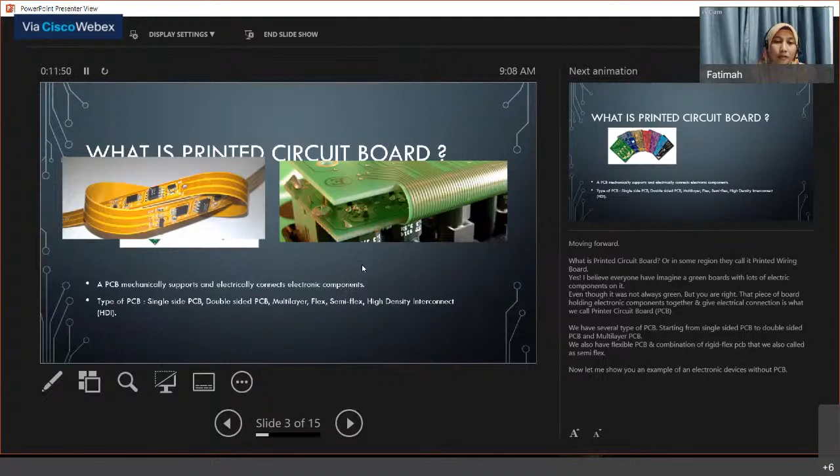And the last one is HDI, high density interconnect. The complexity is higher than the rest. This is what the future will look like. Even though a lot of electronic devices are already using HDI type PCB.

Now let me show you an example of an electronic device without PCB. Oh sorry, I have another one first - this PCB with components is called PCBA. When it's bare without components, we call it bare board or PCB. But if the PCB has components, we call it PCBA, printed circuit board assembly.

I want to show you here an electronic device from 1948 that did not have a PCB. We can see here it's a little bit messy, and I believe it's very hard to troubleshoot if your TV has a problem in this area.

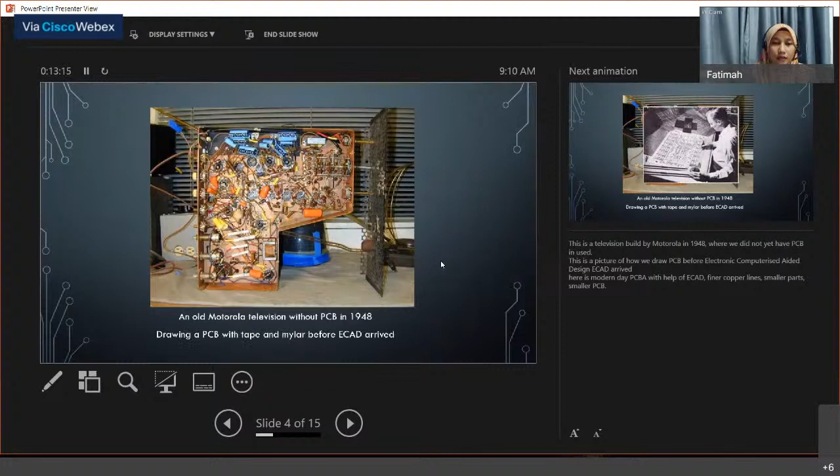This is a picture of a PCB engineer drawing a PCB with tape and mylar before ECAD arrived. ECAD is electronic computer aided design. So this is the outlook of a modern day PCBA with the help of ECAD.

The copper we can see here has finer lines. Components are smaller, and the PCB is smaller, and even if it's the same size, the function will be - they can cater to a lot more functions.

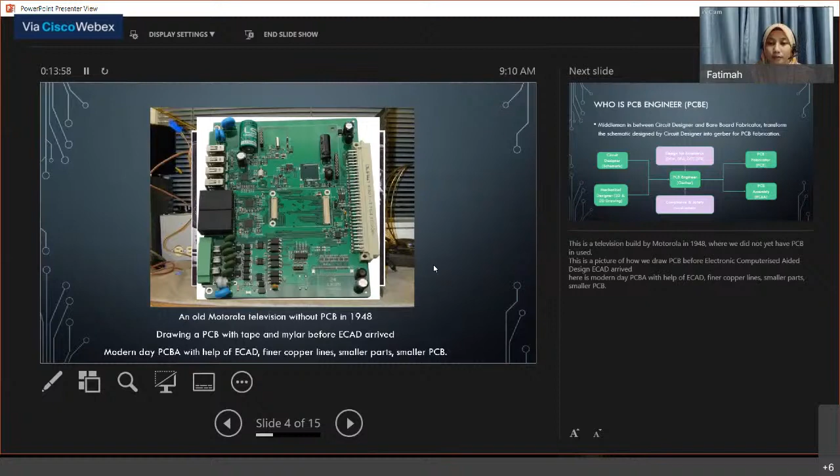So moving forward, who is a PCB engineer actually? In layman's terms, a PCB engineer is actually a middleman between the circuit designer and the bare board fabricator. They transform the schematic design by the circuit designer into Gerber files for PCB fabrication.

So we have an image here. PCB engineer is in the middle between circuit designer and PCB fabricator. The circuit designer will give output in a schematic and give it to the PCB engineer, and the PCB engineer needs to export it to Gerber. With the Gerber, we give it to the PCB fabricator to fabricate and it becomes a PCB.

That is, I can say, a very straightforward arrangement, but in actual practice it's a lot more complicated than that. We take information from the schematic, also the mechanical information in 3D and 2D drawings, and make it input, taking it into our ECAD system. From there, we do the process of making the PCB.

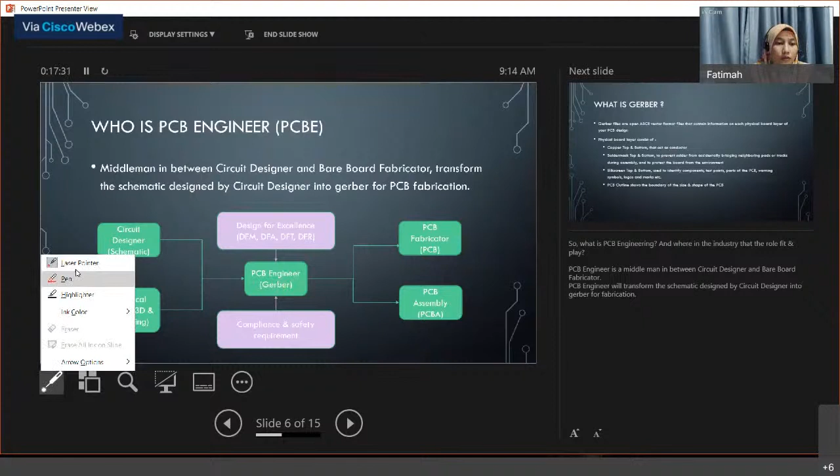So the output here is Gerber. What is Gerber actually? Gerber is a series of files in a format of ASCII vector that contain information of each physical board layer of your PCB. So what is a physical layer? A physical layer is something that we can see in our hand.

From the PCB, I did not have an example in my hand because I'm at home. But the PCB, if we can see, usually they will be a color, right? Green, or red, yellow, blue, black, white. This color actually comes from the solder mask.

But okay, we talk about this one first. So the essential is the copper top and bottom that acts as a conductor.

Then another one, the second most important thing for me, is solder mask top and bottom. Solder mask is to prevent solder from accidentally bridging, because currently our artwork, our layout has become narrower and smaller. It will be a high chance for us to have a bridging solder if we did not properly solder mask our PCB.

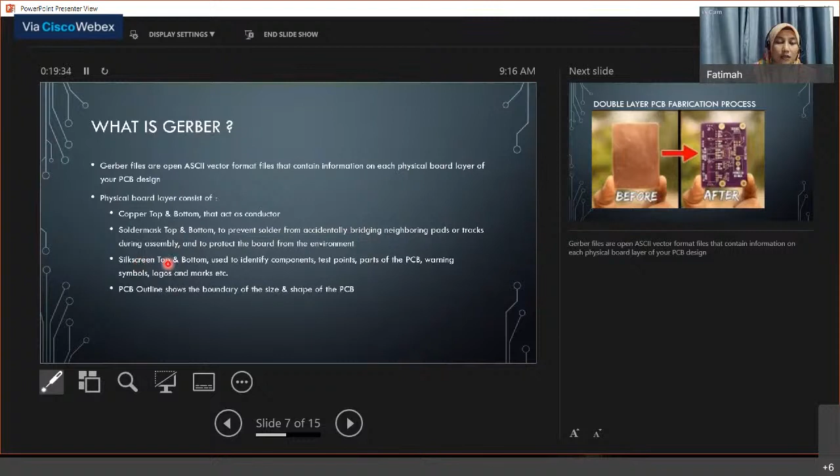So silkscreen is not essential actually. It's used to identify components, test points, parts of the PCB, warning symbols, logos, marks, and etc.

But with the more high density PCB, the less silkscreen will be used, because silkscreen adds to the thickness of the PCB, and then your stencil, when the solder paste wants to squeeze, it will be uplifted a little bit, and disturb your solder paste quantity on top of the PCB.

And then the last one, but also the most important one, is the PCB outline, that shows the boundary, and the size and shape of the PCB.

Okay, so the next one I will show you is how from the Gerber, our fabricator will make a PCB.

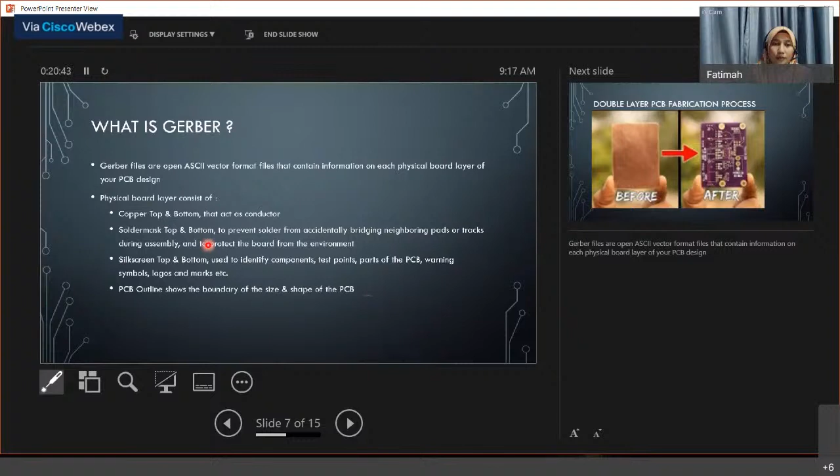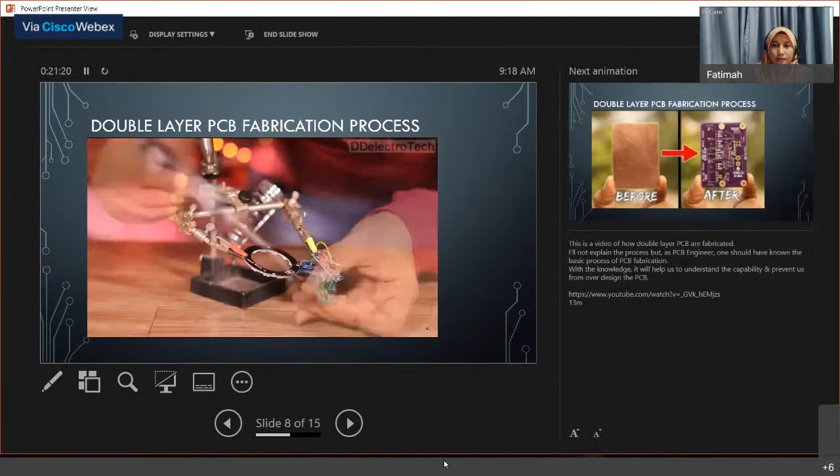In the last 4 years, I have made hundreds of electronics projects. In almost every electronics project, I have used PCBs, but this time we are going to China, to a city called Shenzhen, to show how PCBs are actually made. Thanks to PCBWay for inviting us there.

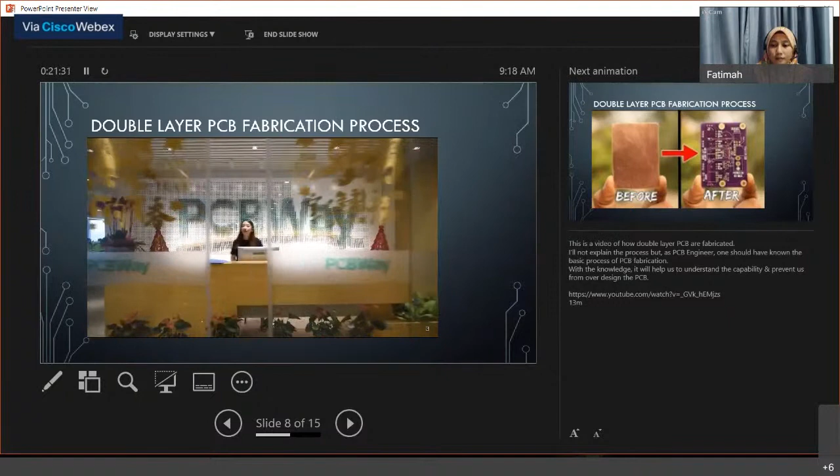After we make a PCB order on their website, first engineers inspect our uploaded PCB file. They conduct a DFM review by checking the trace widths, the space between the traces, hole size, etc., and ensure the design is error-free and fits within manufacturing capabilities.

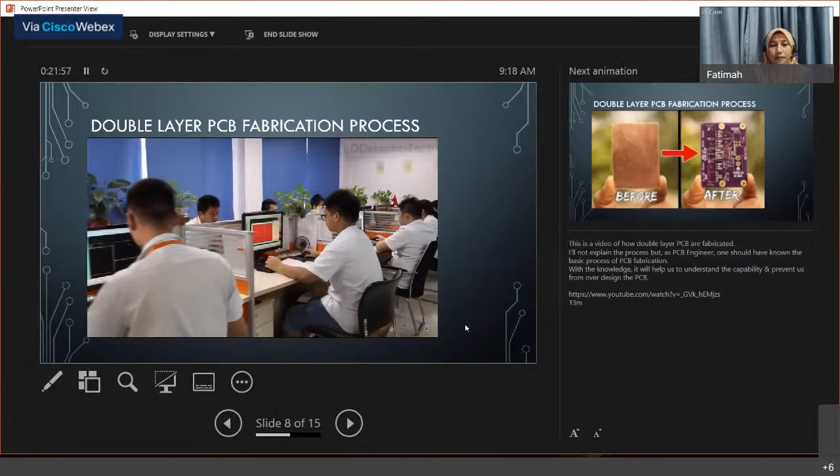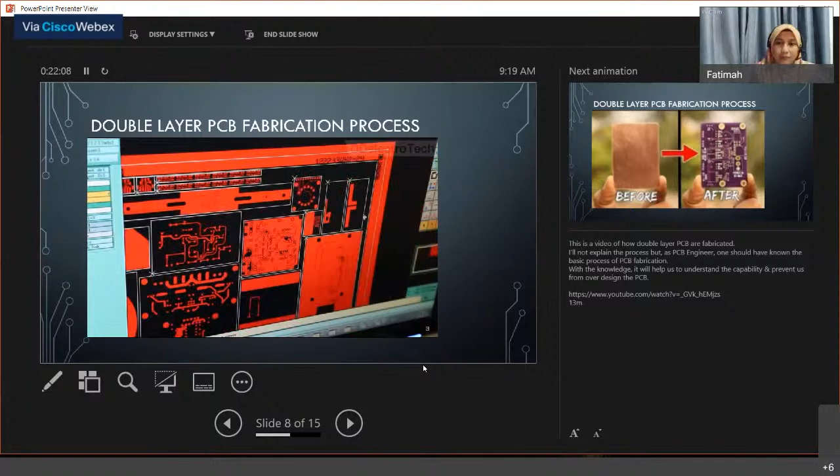After checking several circuits, they combine them on a large production panel, which is much more efficient to handle through the factory. Thus, the production cost also decreases.

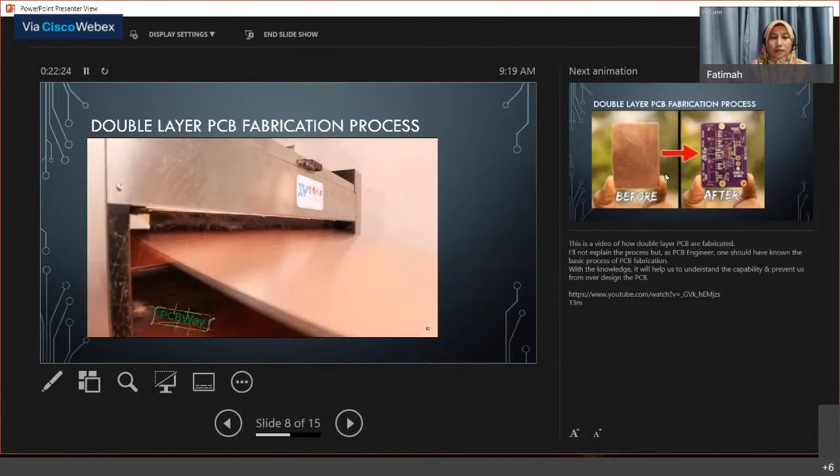First, the board is dry cleaned in a machine, and then cut into small pieces, which is suitable for manufacturing.

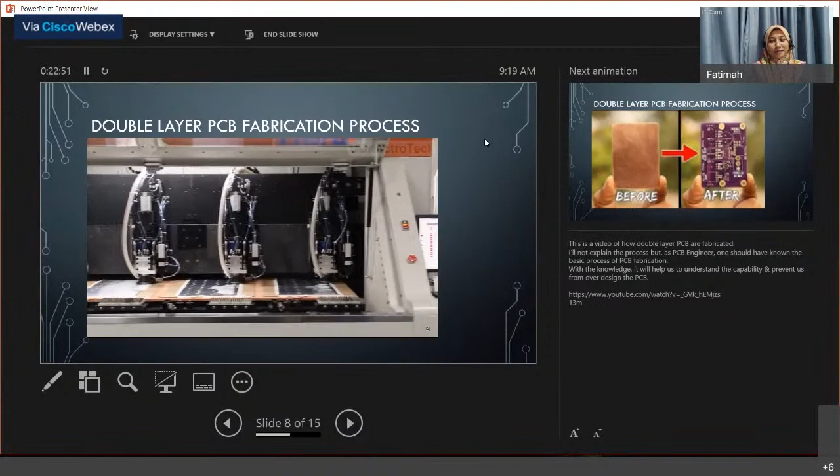After cutting the boards, they come to the drilling room. Drilling is done for two purposes: for connecting the leaded components, and for the via holes that link the copper layers together.

First, the operator takes an MDF board as exit material. Then he loads one or more PCB panels and places it on the machine. And finally adds a sheet of aluminium as entry foil.

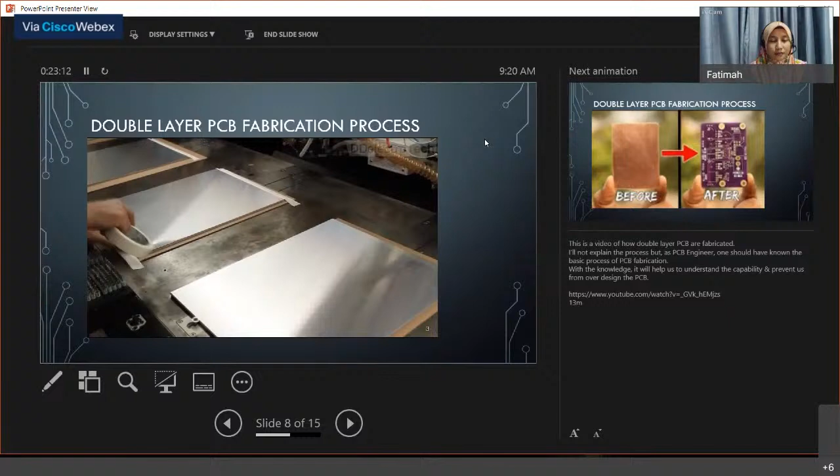Those machines are computer controlled. After selecting the right drill program, the machine starts working.

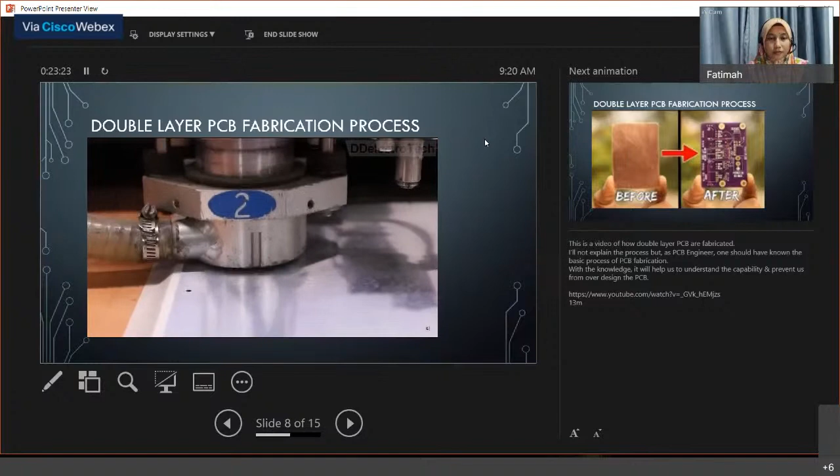Drill change is fully automatic. The machine selects the drill to use from the drill rack and checks that it is the correct size, and then loads it into the drill head.

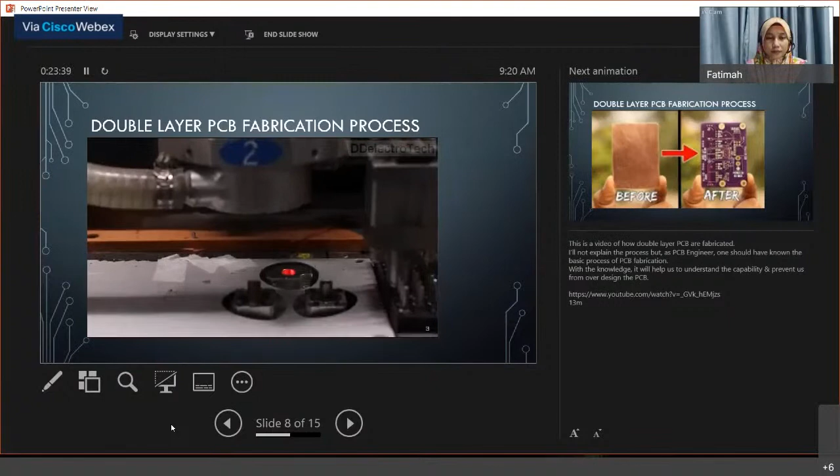This is an air-driven drill which can rotate up to 150,000 revolutions per minute. The high-speed drill makes the hole walls cleaner.

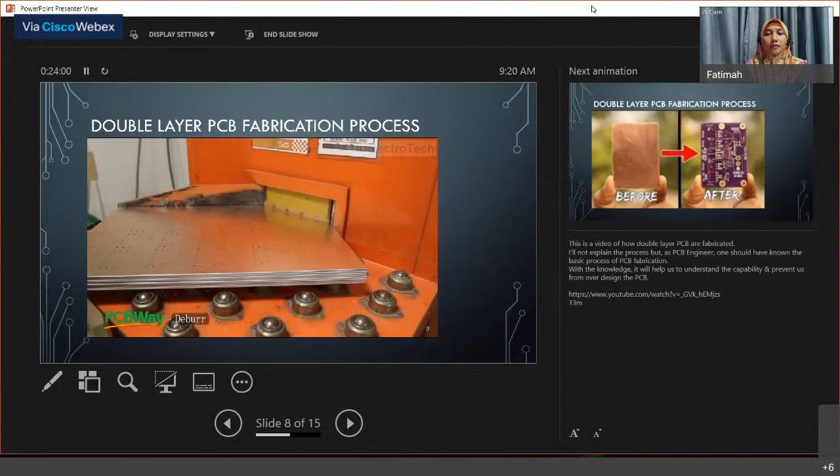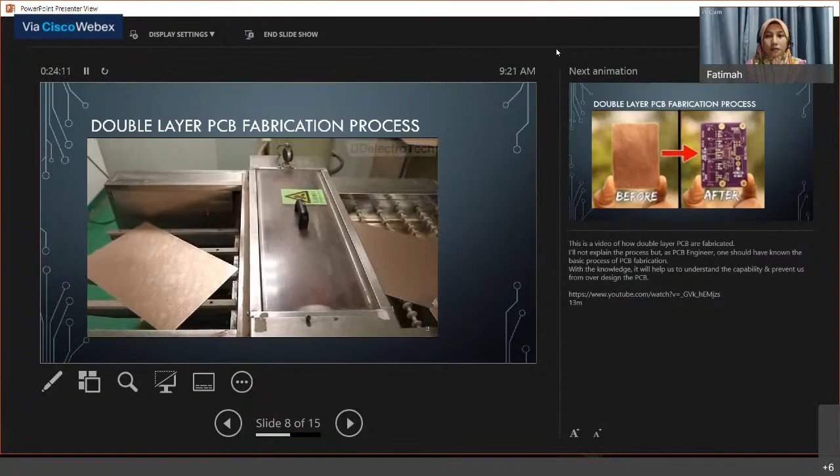After that, the corners are trimmed to make it rounded. Then the surface is cleaned. The machine automatically smooths the edges of the boards, one side at a time.

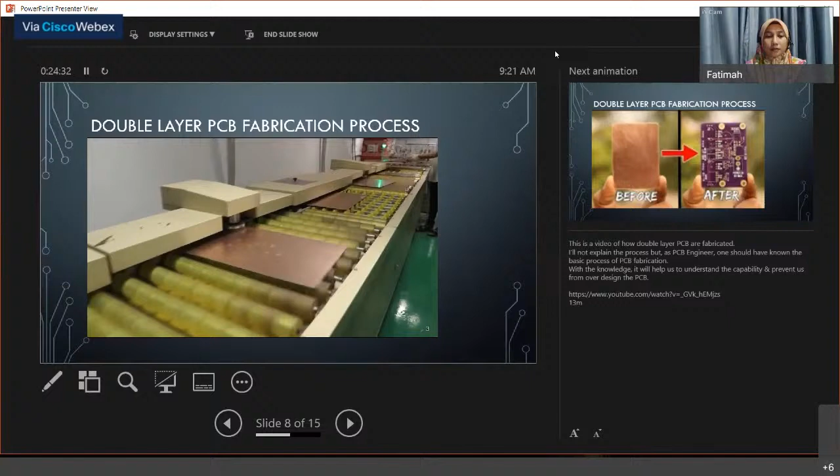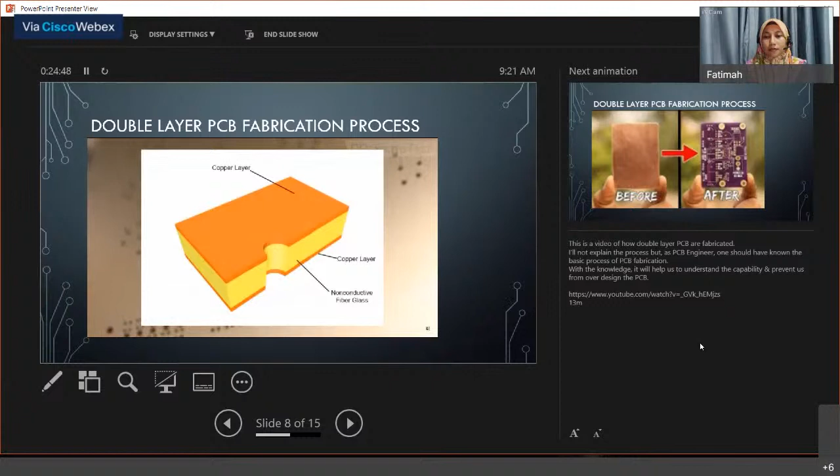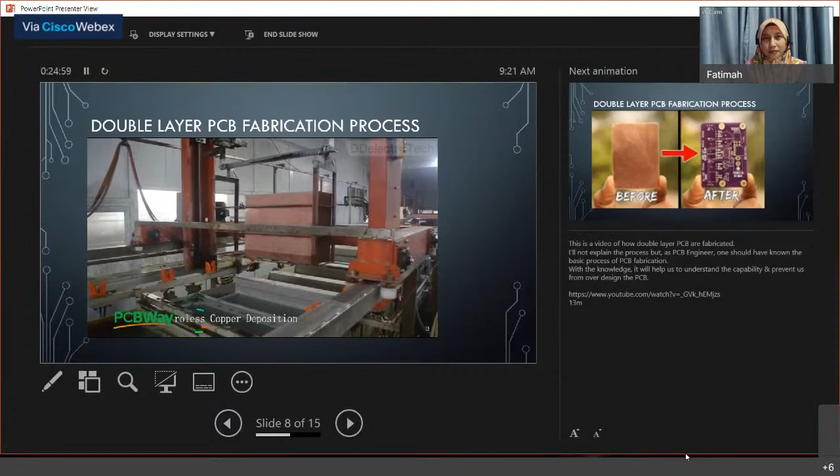As the board has drilled for making connection between top and bottom layer, but the middle layer is non-conductive fiberglass. So to make connection between top and bottom layer, the board comes for electroless copper deposition. The operator loads the panels onto the flight bars. The panels themselves act as cathodes for electroplating.

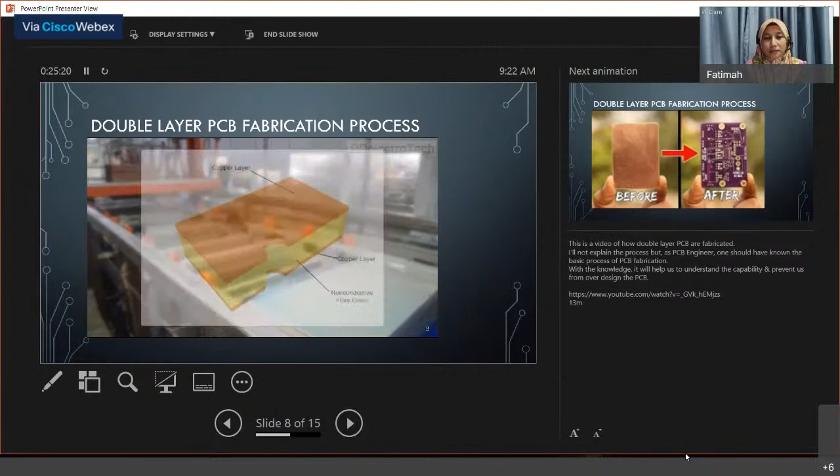The panels are carried through a series of chemical and rinsing baths by the overhead crane. This is a multi-stage process and everything is controlled by computer to ensure about 1 micron thick copper has deposited over the walls of the hole. After that, the board goes through a series of process where copper is plated up to a thickness depending on the required final finish for the panel.

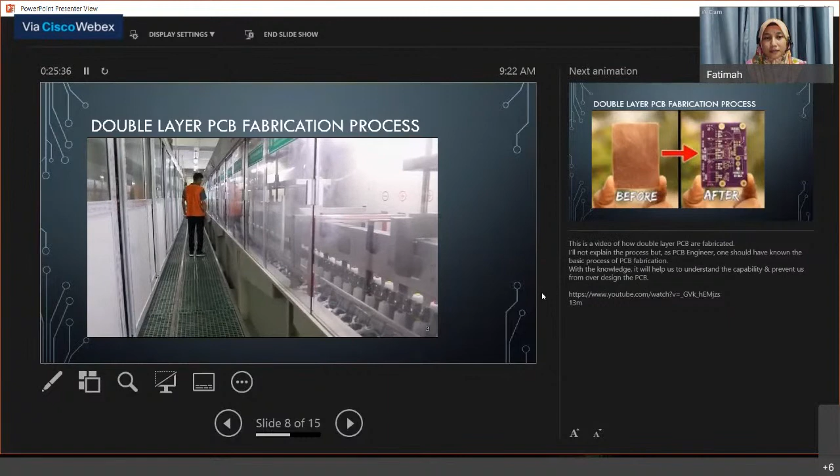This process took about 40 minutes of time, and then the board automatically goes to another room for the next step. To enter into this room, we need to put on a special type of anti-static clothes, and we need to pass through a dust cleaning chamber.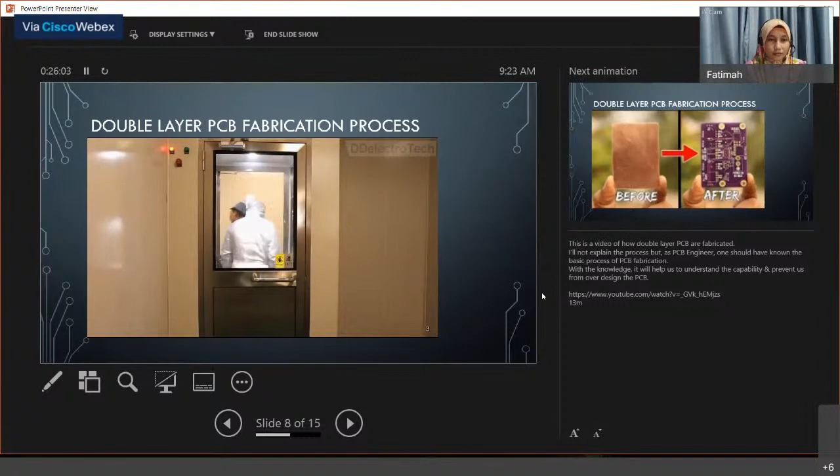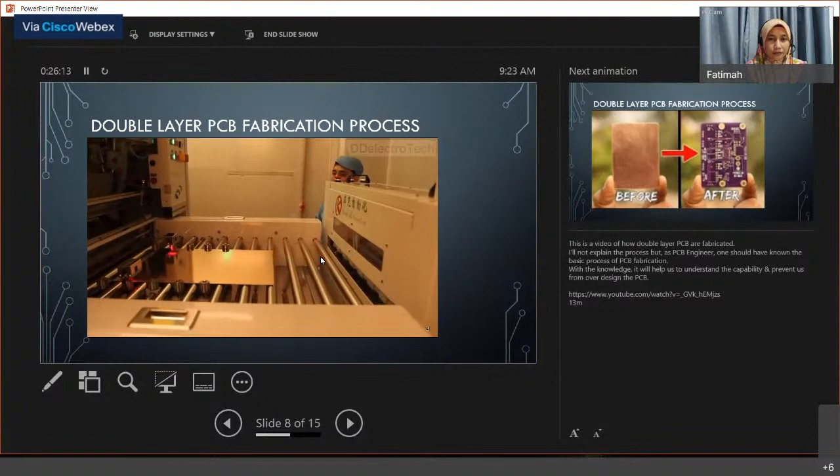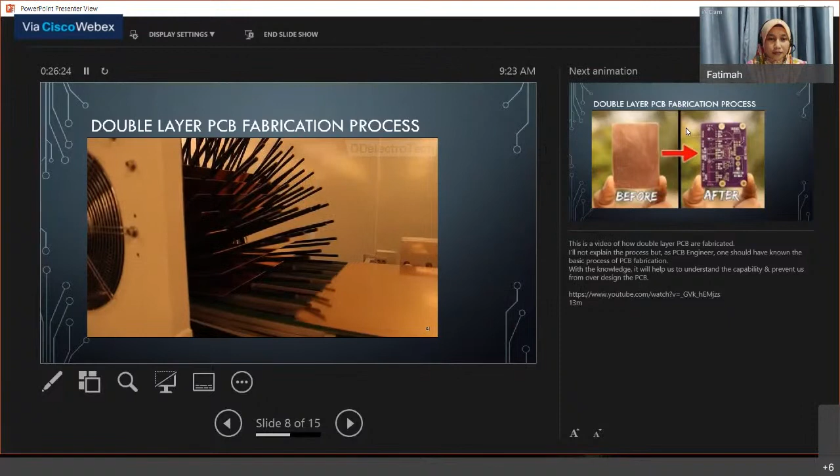Then the panel is first coated with a layer of photosensitive film, the photoresist, which is hot rolled onto the copper. This machine does this automatically, or sometimes this process is done manually.

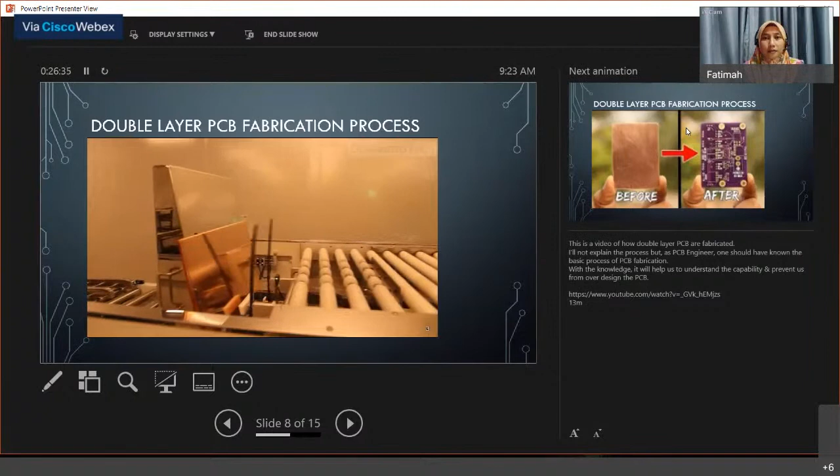This film is blue light sensitive, so all the lights in the room are yellow, so the light does not affect this film.

Then the operator cleans the films. The film is the one which already has the printed circuit diagram on it, and loads the first film. Then puts the laminated panel, and finally the second film.

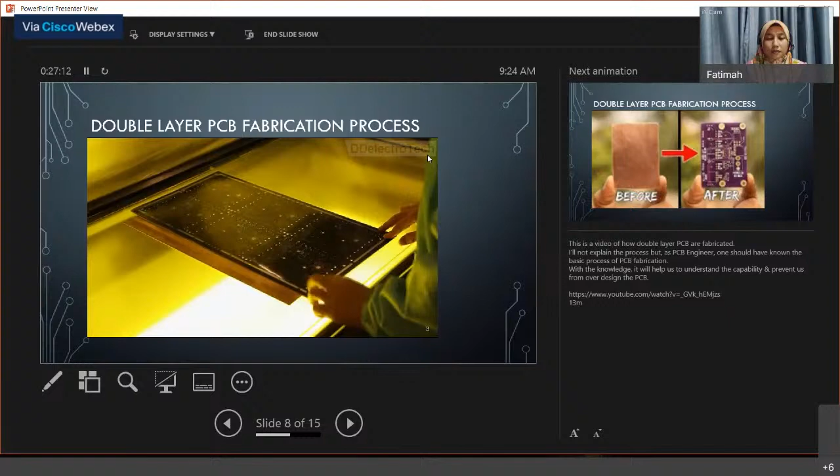After perfectly aligning both layers, the board is sent to the printer. The printer uses powerful UV lamps to harden the photosensitive film according to the circuit printed film. So after this process, only the circuit part is hardened and the rest of the unwanted areas remain soft. Modern machines can do this whole process automatically.

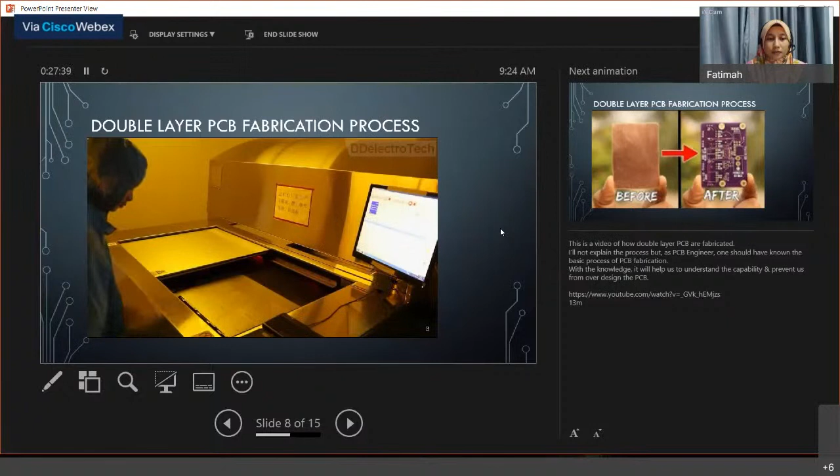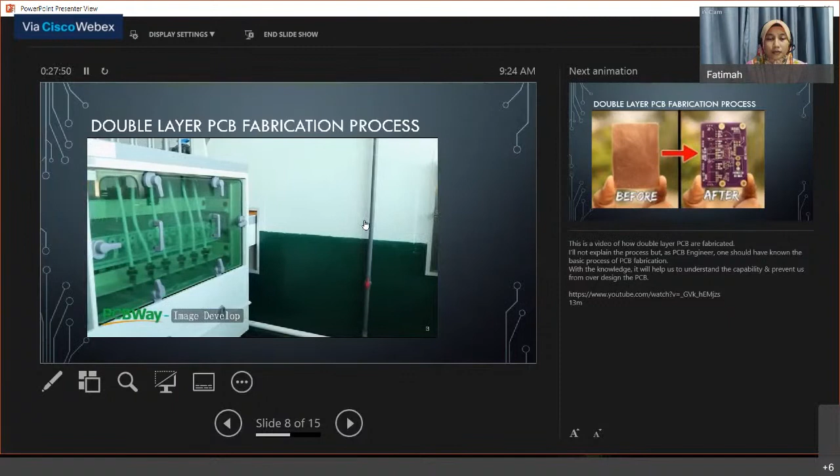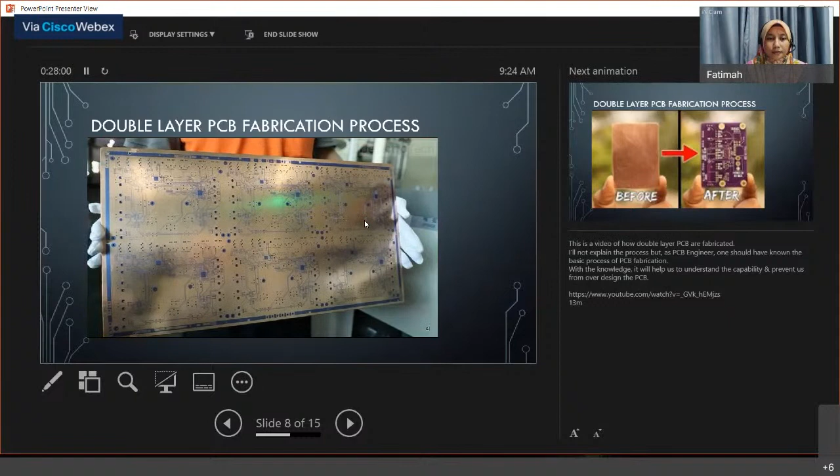Next, the board is processed through a chemical solution or developer that removes the unhardened and unwanted resist from areas that were not polymerized by light. After this, you can clearly see only the circuit is printed by blue resist, and this material will resist the chemical at the etching process.

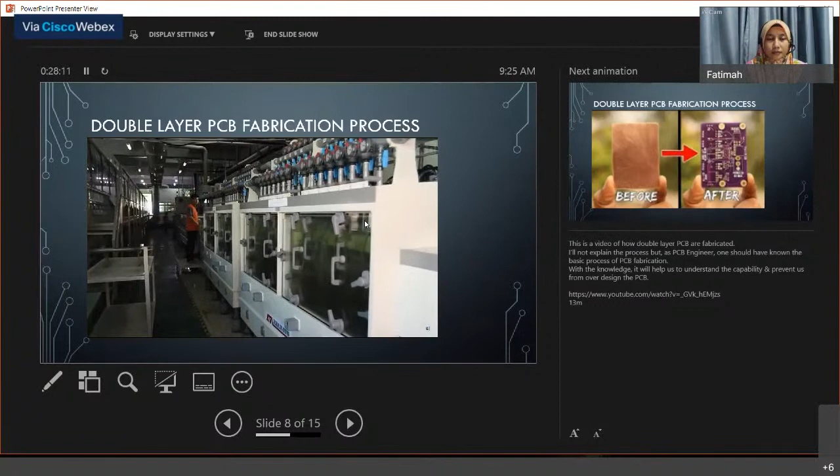Then the board is sent for etching. This process is to remove the unwanted copper using a powerful alkaline solution. After etching, the boards need to be cleaned and washed to remove the excess chemical solution.

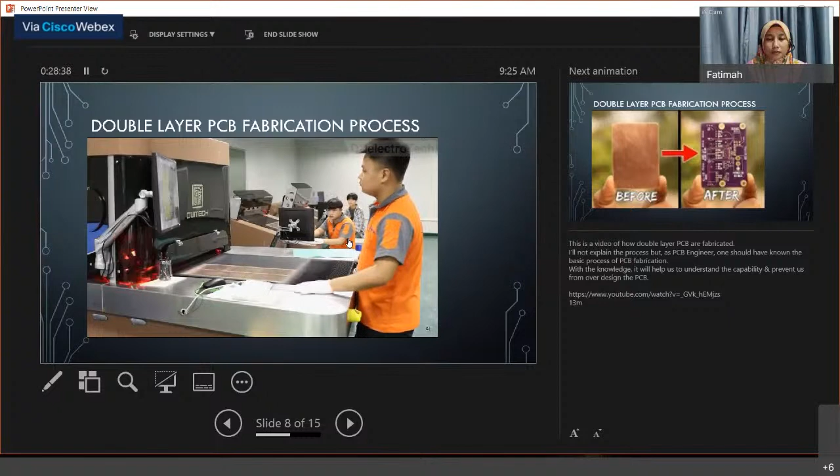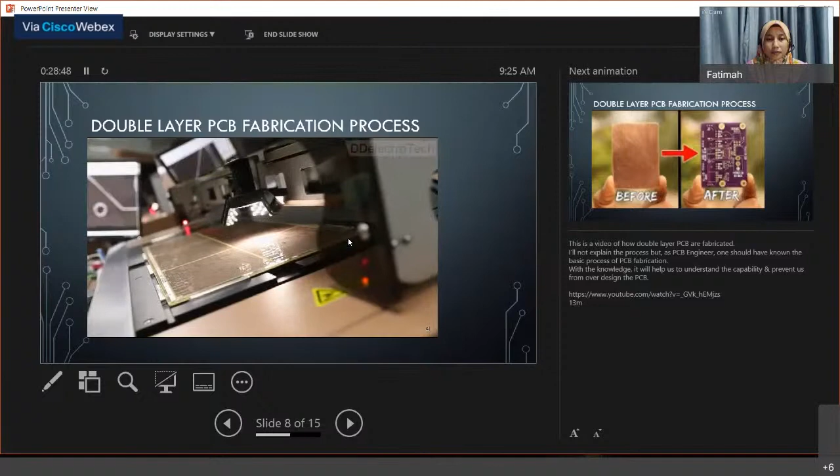Then the boards come for automatic optical inspection, or AOI. This machine enables fast and accurate inspection of PCBs to ensure that the quality of the product leaving the production line is high and the items are built correctly and without manufacturing faults. When detecting circuits, the machine automatically scans the PCB through the camera, collects images, and compares the tested solder joints with the qualified parameters in the database.

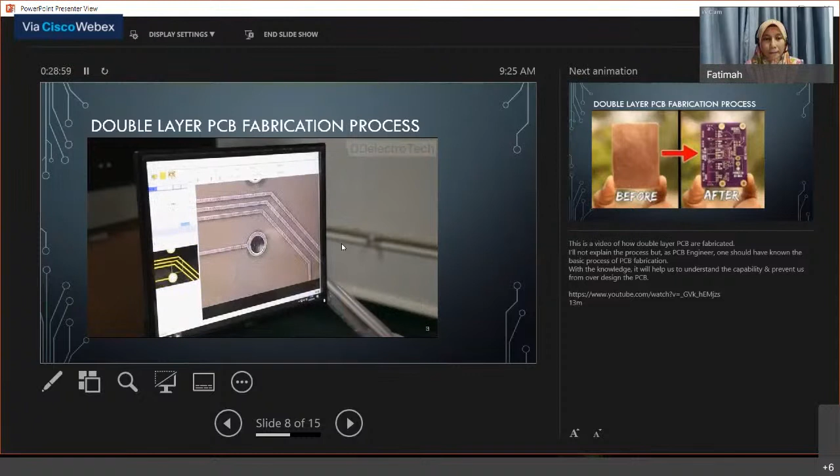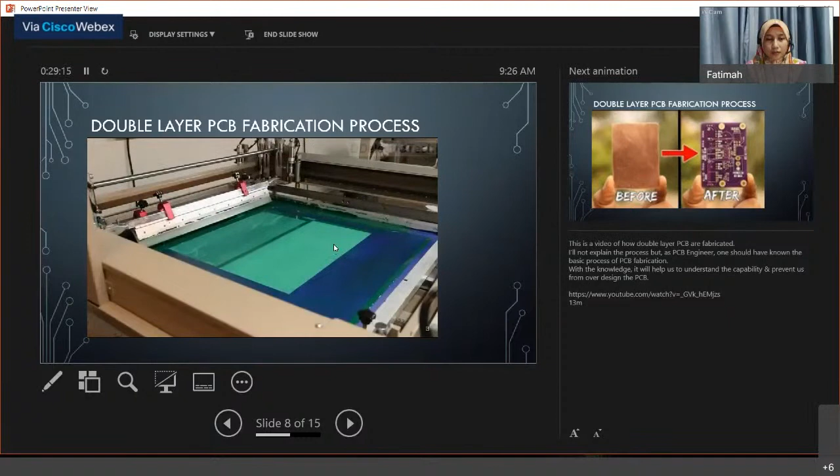When everything is okay, the board comes again to another yellow room for solder mask. This coating machine simultaneously covers both sides of the panel with epoxy solder masking. Solder mask is required to protect the copper surface and prevent solder shorting between components during assembly.

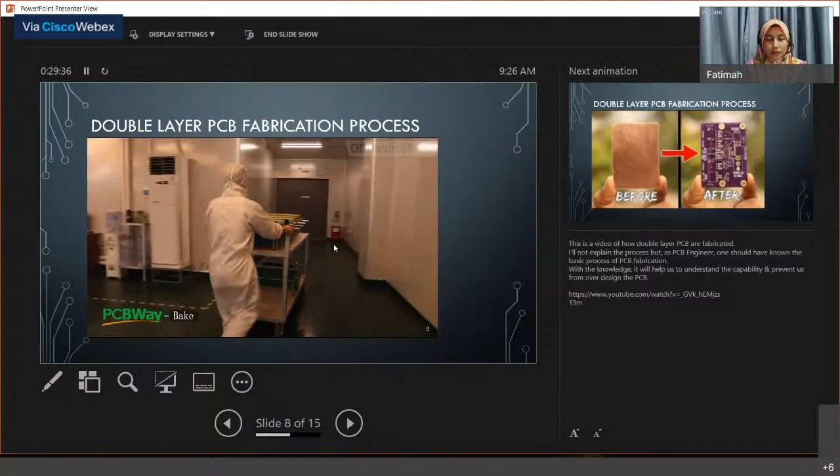After applying solder mask, panels are now racked and put through a conveyorized dryer at 87 degrees Celsius, which hardens the resist just enough for the next stage. Usually it takes almost 25 minutes to bake.

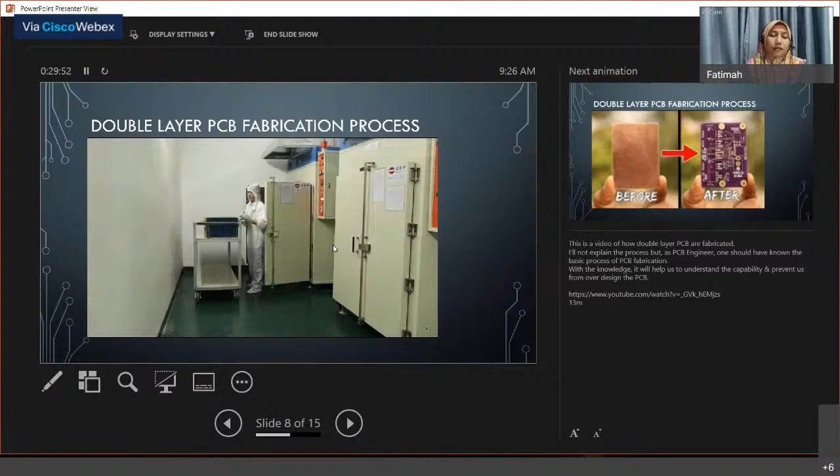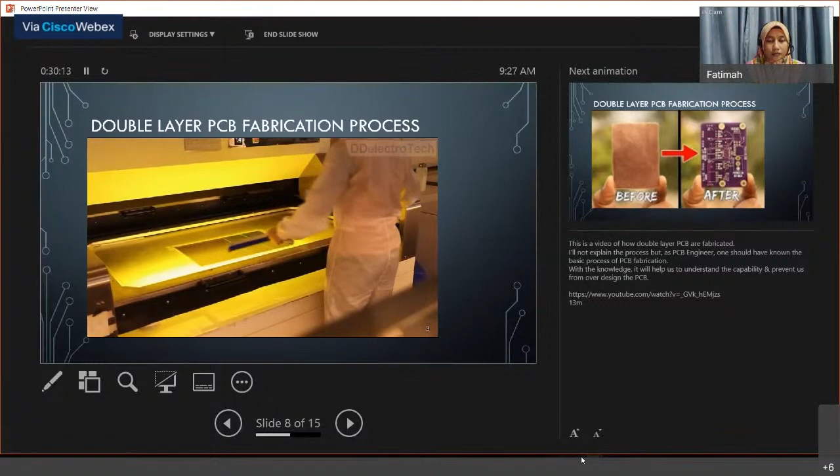Solder mask is applied all over the board, so to remove the solder mask from the solder pad, first the operator takes the PCB and then aligns the photo film carefully at both sides simultaneously. The UV lamp in the machine hardens the ink where the film is clear. Later on, the unhardened and unwanted resist is stripped off.

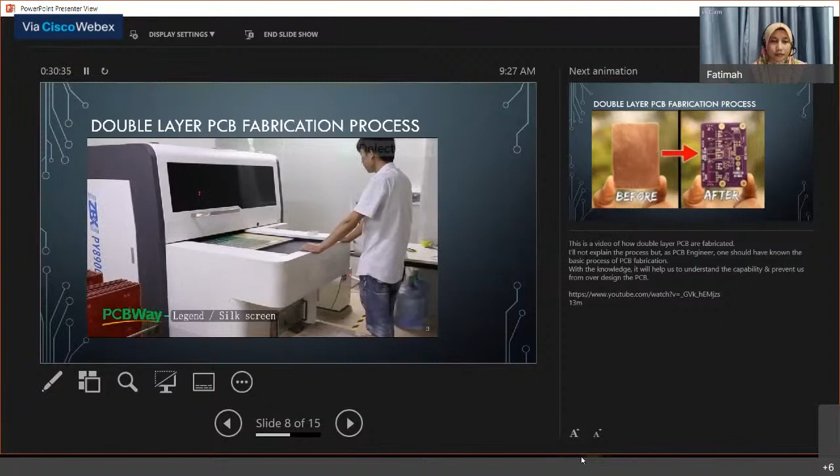Most PCBs have a component legend to show which component goes where. They use inkjet printers to image the legends directly from the board digital data. This printer is very advanced. The operator only needs to find the silk screen file corresponding to the board and set the positioning on the main control computer.

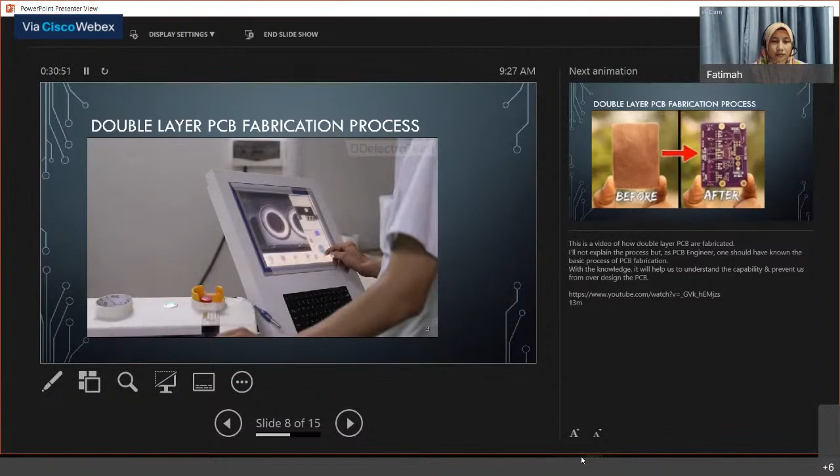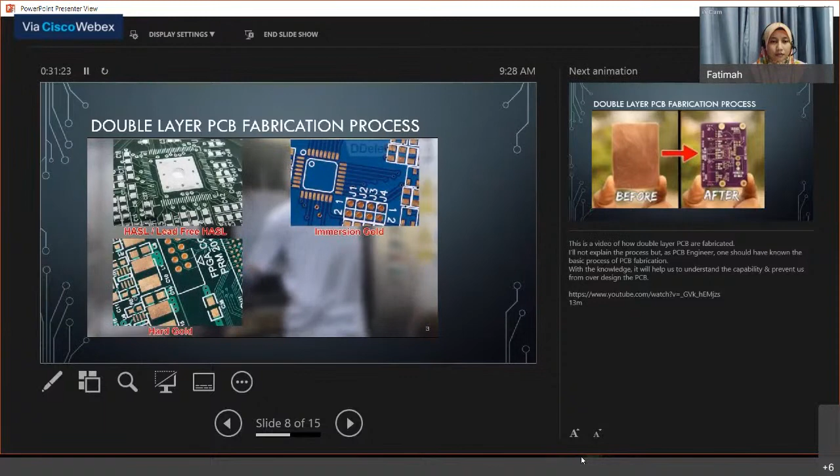Then the ink will be applied on the boards evenly and automatically. Moreover, it can also be printing and curing on the same system. To protect the copper of the solder pad from oxidation, hot air solder leveling is often chosen as a surface finish method for circuit boards. In addition to the usual HASL, they also provide a variety of surface treatment methods such as immersion gold, hard gold and OSP for customers to choose according to their needs.

Finally, the PCB production process is done. Then they electrically test every multi-layer PCB against the original board data. Using a flying probe tester, they test the high voltage insulation and low resistance conduction of the circuit boards and check each net to ensure that the circuit is complete and there is no short or open circuit.

For high volume production, they use an automatic e-test machine which saves time and money because it runs at a high rate.

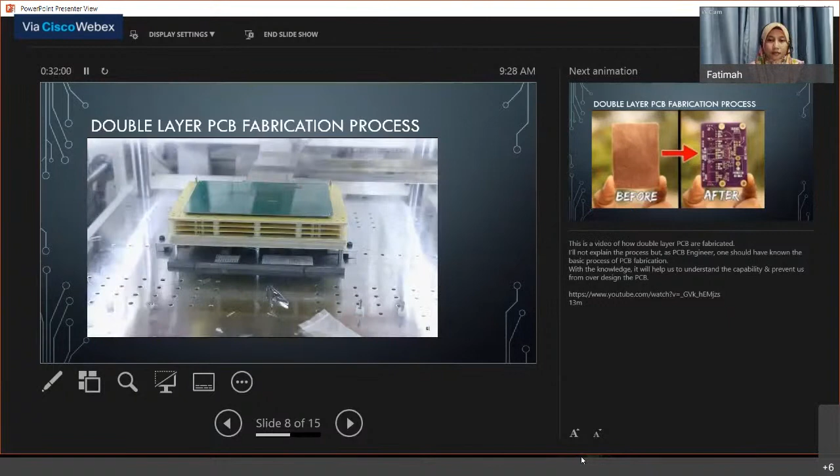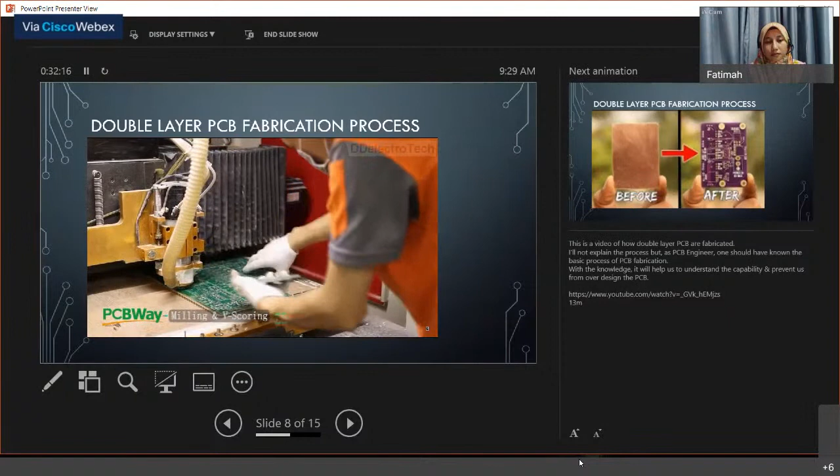After all testing, the boards come into the milling room. Now it's time to separate all individual PCBs from the large production panel. The operator loads one or more PCBs onto the CNC machine, and chooses the right program for those boards.

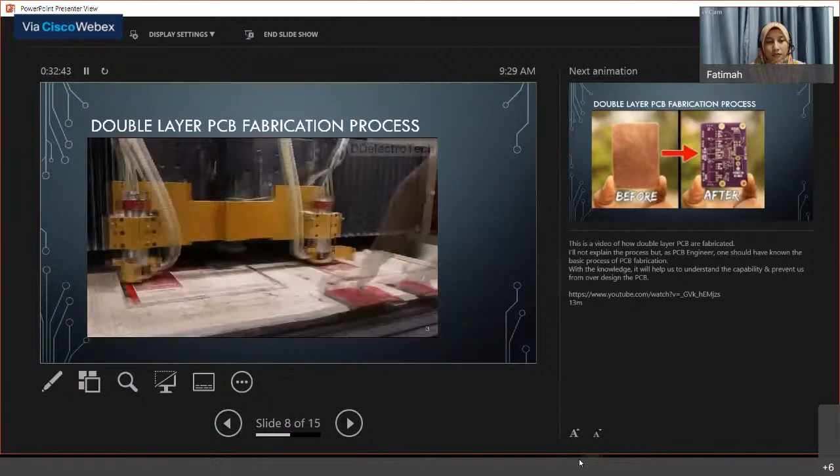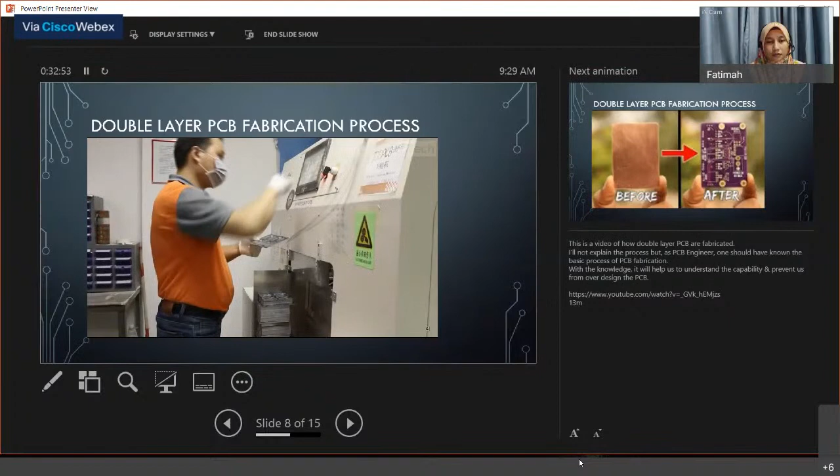According to customer needs, the board or array can also be V-scored so that they can easily be broken apart after assembly.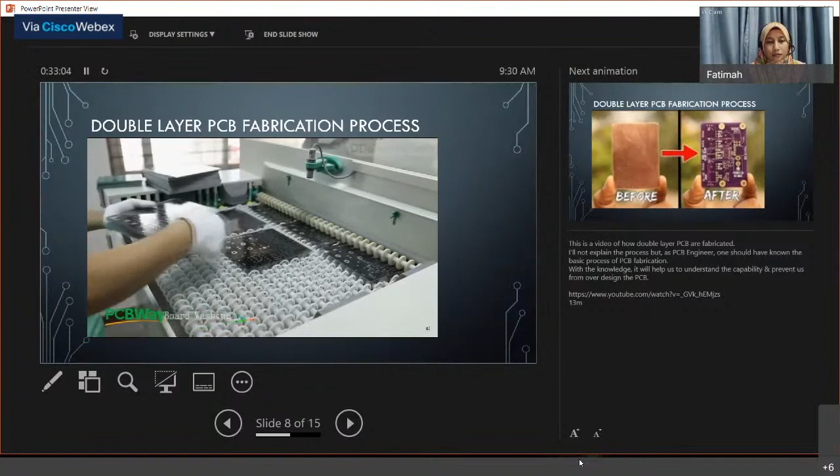After milling, the board comes for cleaning. This machine cleans dust and oil stains using ultrasonic waves. After wet cleaning, the boards are dried.

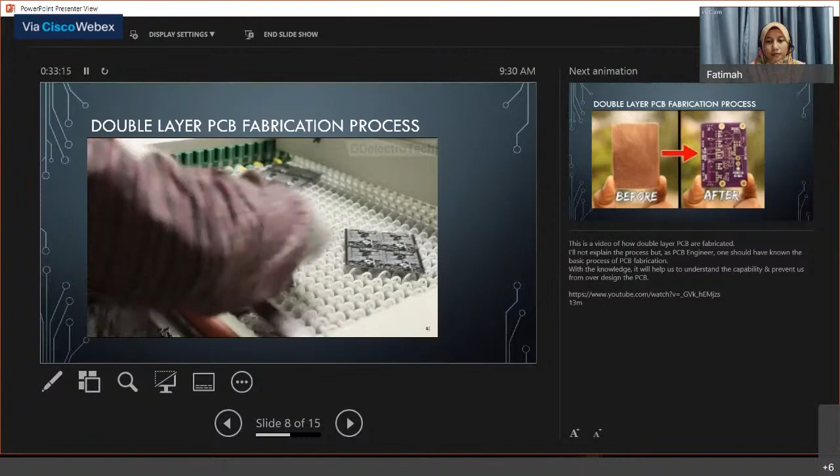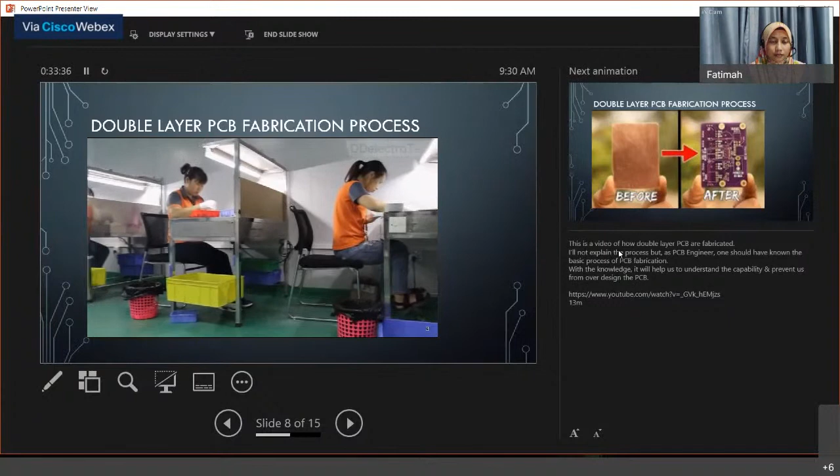Then a team of sharp-eyed inspectors give each PCB a final and careful checkover. She looks for any cosmetic defects like scratches and marking, also checks aperture, thickness, holes, etc. After inspection, the PCBs are vacuum sealed and bubble wrapped to keep out dirt and moisture.

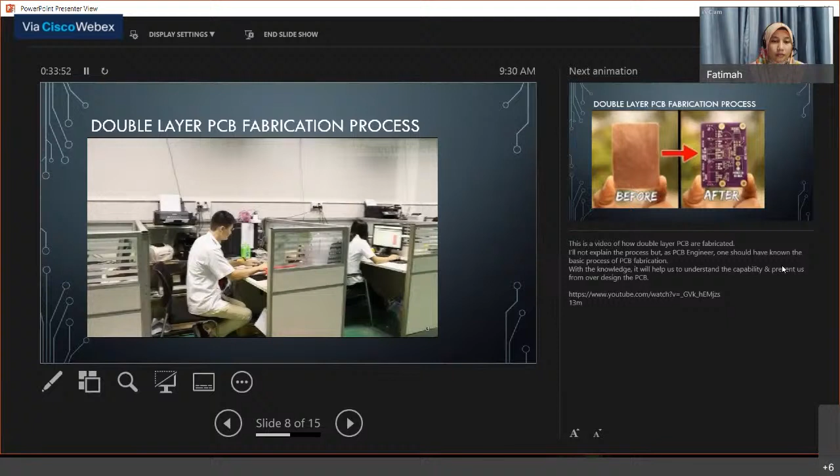Then the packets come to the packing room. After printing out the production release note, PCBs are securely boxed inside foam wrapper.

And at the end of the day, courier comes and takes the package and delivers all over the world.

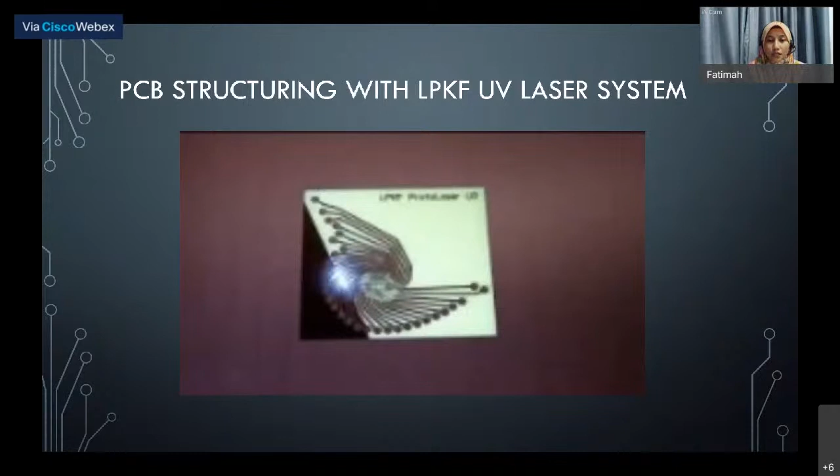So before I already said about the HDI technology that has become our, I can say, future technology. The latest technology that we have in PCB design. So this HDI, they are very fine print. The via is very small. We cannot drill by a driller.

So how are we doing HDI PCB? We will use laser. So this is an example that I can find, a video that I can find for this PCB. What happened?

Alright, they did not have any sounds, so maybe you can just watch and enjoy.

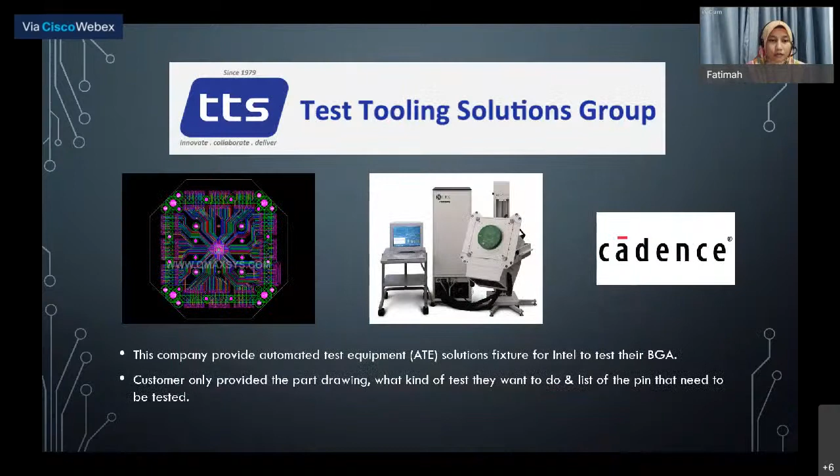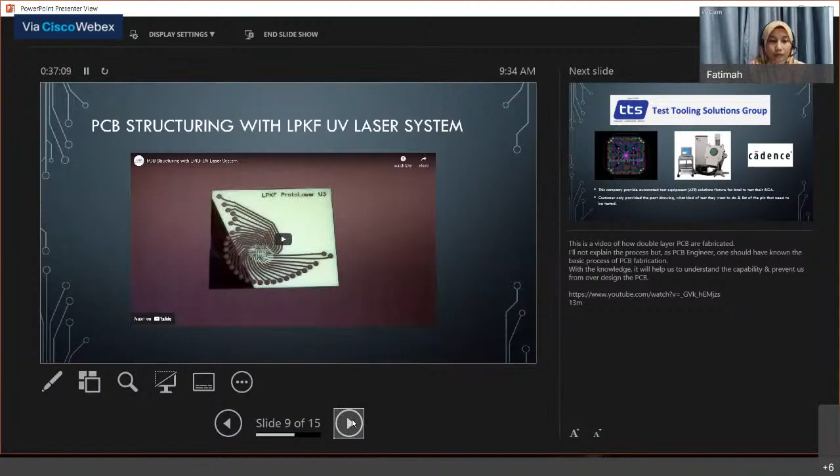Okay, so next I want to share about my experience in a different company. So the first company I started drawing PCB with is Test Tooling Solution. I joined this company for 6 months as on-job training while I was in the inset program.

So this company provides automated test equipment solution fixtures for Intel to test their BGA. Some of the boards I worked on were to test their lifetime, the BGA lifetime, their contact resistance, IC continuity, also thermal verification. So that is what I already learned during my 6 months over there.

So if you can see here, this is what the PCB looks like. The automated test equipment solution. So this is the automated test equipment. So what this company provides is this PCB. This is actually quite big. If you see, the size is the same as the monitor over here.

Then we will put the IC that needs to be tested at the center, and all the sockets that link to this machine will be put at the side here. It's good. Looks like quite simple, but actually the layout technique is different based on what the customer wants to test.

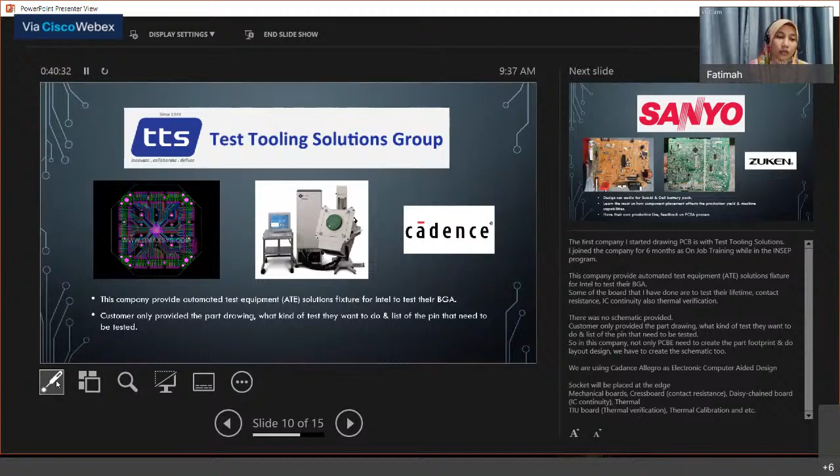After Test Tooling Solution, Sanyo was my first job. If you try to search for it now, you won't find it anymore because this company was already bought by Panasonic, I think the same year GST was implemented in our country. So this company was actually designing car audio for Suzuki and Dell battery packs.

I did not get enough experience to actually design the board, but what I valued most was learning how component placement affects production yield and machine capabilities. If you see here, this is a single layer PCB, the copper is only on one side, and we can see how the components are placed because all of this will be dipped into solder wave.

So you see the direction of the wave is like this. And the IC, we did not put it at 90 degrees, we put it at a 45 degree angle like this, so we will not have a shadow effect. And if you see at the edge of the connector, they will have a solder trap. So this is something we need to think about when we place components prior to the layout, prior to connecting the dot.

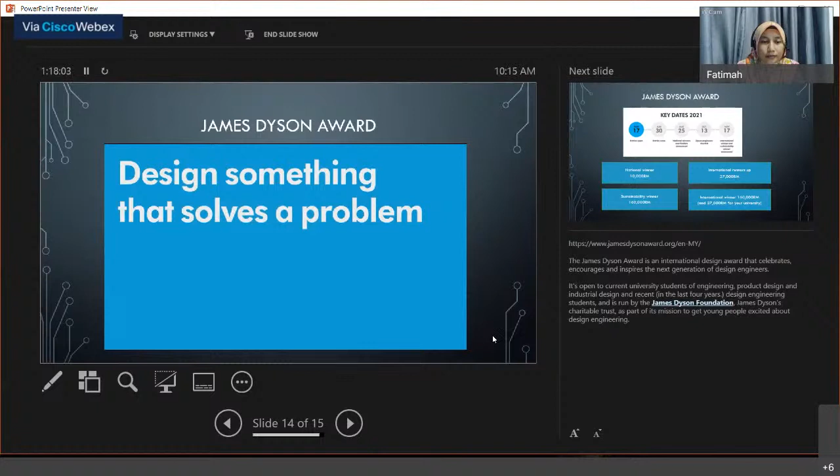Let me share this video from James Dyson. Design awards are usually about making products that look beautiful, but that's only a tiny part of the story. For me, the importance of the award is to solve a problem, question things, challenge things. I've always truly believed that young people want to change the world, and that's absolutely right, they should do. And it gives them the confidence that they can literally do that. Winners get the notice they need to move forward with their idea. And I think it gives investors confidence as well.

So if you are interested, please visit the James Dyson page, because it's open to current university students of engineering, product design and industrial design, and recent graduates. Recent means within the last 4 years, so if you already graduated but less than 4 years, you can still join the competition. This James Dyson Award is actually run by the James Dyson Foundation, a charitable trust, as part of its mission to get young people excited about design engineering.